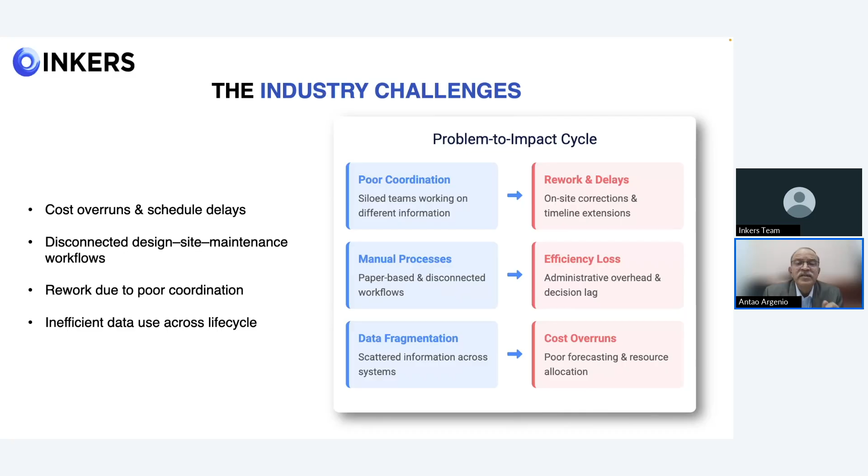Efficient data use means using insights for predictive maintenance, better design, and continuous improvement. The future lies in connected data ecosystems where digital twins, AI, and analytics can turn all this raw information we have collected into real business value. To summarize these four points, cost overruns, disconnected workflows, rework, and inefficient data use, they're all interconnected. They reflect the need for greater integration, collaboration, and digital transformation. Addressing them is not just about technology, it's about changing how teams work together across the entire life cycle of a project, from concept to operation.

Now, even though we have the case that we have to adopt digital transformation, there are still barriers for us to address, to overcome. So even though we have clear benefits, this transition to intelligent construction isn't smooth. It's not so very easy, and it's not happening at the pace that we want it to happen, because every transformation faces resistance. Let's look at what's holding construction back.

The common challenges that we have: cost perception. Upfront tech costs overshadow long term savings. This has been a long term issue with the industry. When we review many of our projects, what we find out is that until it is adopted on a large scale, it still remains a little bit prohibitive sometimes to adopt technology. But the overall benefits that we can gain overcome the cost that we incur for projects.

My second major challenge is basically the cultural resistance. Why this cultural resistance? Project managers always have fear of change, loss of control. There is a lot of resistance, not only to the change, but also to data sharing. We have all information in data silos, where there is a lack of interoperability between platforms. That means all systems are disconnected. There is no system that is talking to the other.

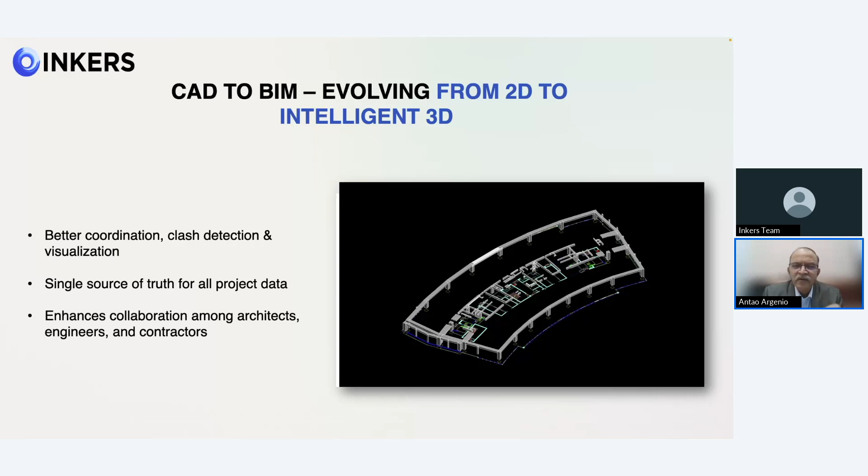The first step is generating a BIM model. And of course, the second step is turning reality into intelligence. That means bringing the reality into the models.

When we talk about scanning and creating BIM models, scan to BIM bridges the gap between the physical and the digital world. It captures the real world as-built environment and converts it into a digital twin of reality. Core advantage: it captures exact as-built conditions.

It reduces your site visits and reworks. You can preserve the heritage of the structure because it enables precise retrofit and maintenance planning. The as-built model can help in construction verification, helps in quality control, and having all this information built into the same model, it improves facility management post handover.

The workshop proposed the creation of a benchmark data set, anonymized—meaning you don't know where the data is coming from—but this high quality reality data can be used to train AI for predictive quality control, safety monitoring, and maintenance optimization.

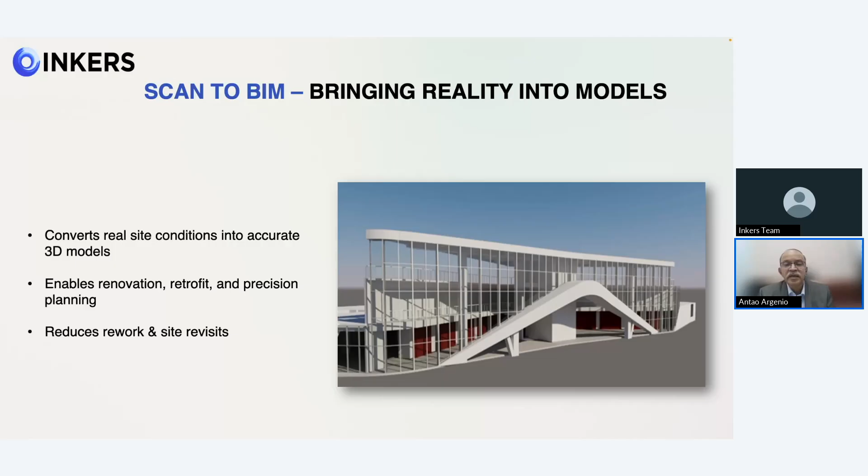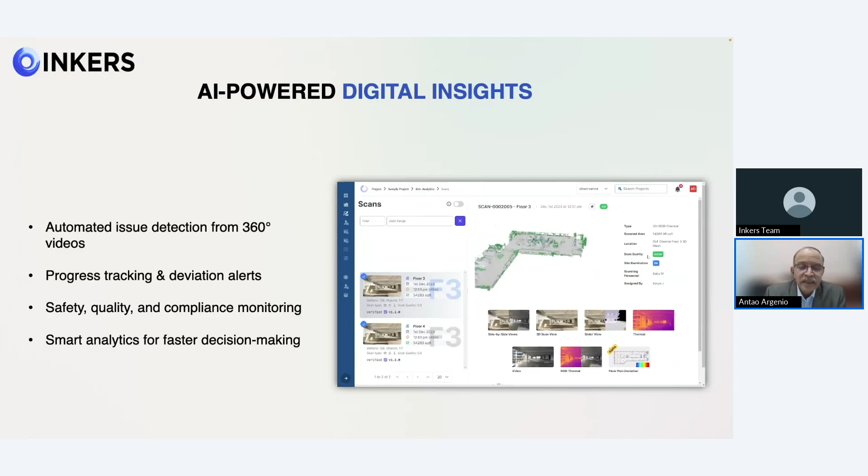So reality capture is not just about documentation, it's the foundation of continuous learning. Coming to AI powered digital insights, which is the new brain of construction, we are adding this intelligence layer, artificial intelligence. It's really the analytical brain that makes sense of the data generated by BIM, sensors, or any other source where we are capturing data digitally.

We already have applications being actioned through this AI powered insights: automated documentation and compliance check, progress tracking from 360-degree imagery, detecting safety violations in site footage, forecasting material demands and labor needs, predictive quality control to flag early deviations, and of course compliance reporting.

Referring back to the workshop, the top AI use case, which we are very close to, is project document generation. What I've not spoken about is knowledge capture and transferring this knowledge to other projects, to other stakeholders.

Predictive quality control can optimize the supply chain. You can forecast resources, track sustainability, analyze workflow efficiencies, and coordinate shared logistics. Each of these actually delivers measurable ROI: saving time, reducing rework, and freeing professionals for higher value tasks.

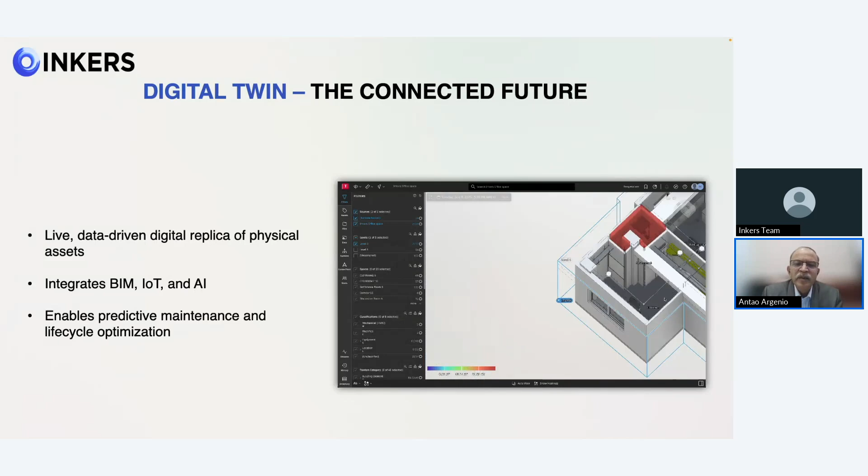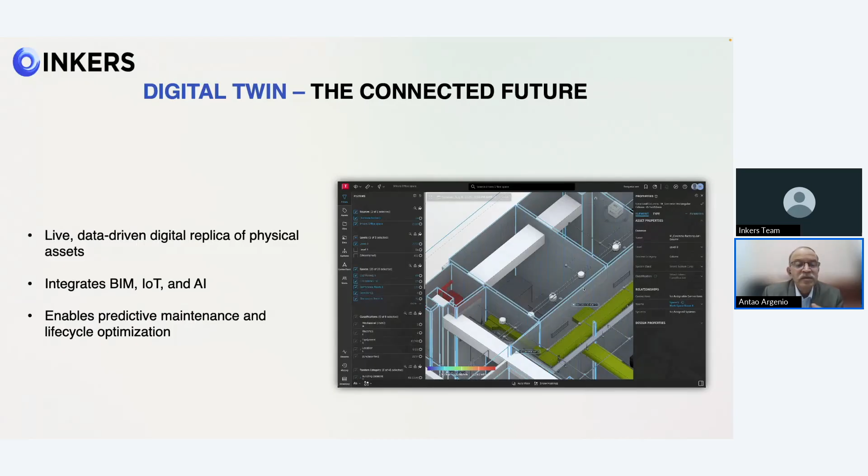What are its capabilities? To name a few: predictive maintenance, energy optimization, life cycle performance tracking, dynamic cost, carbon—the need of the hour—and utilization modeling. And of course there is continuous feedback between the design and operation.

Looking ahead, digital twins are envisioned as part of autonomous, self-optimizing systems, capable of real-time resource allocation, supply chain management, and safety interventions. These twins will not just mirror reality, they will actively manage it.

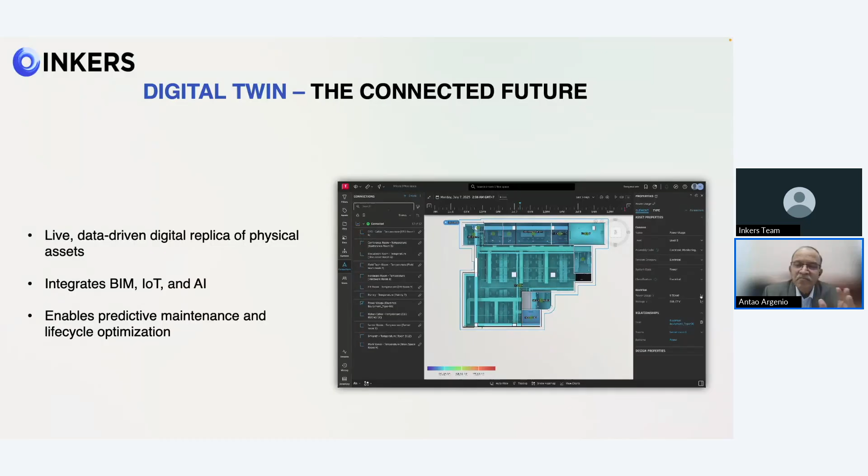In a decade, every major infrastructure asset will have a living digital twin that not only tracks what's happening, but will predict what will happen next.

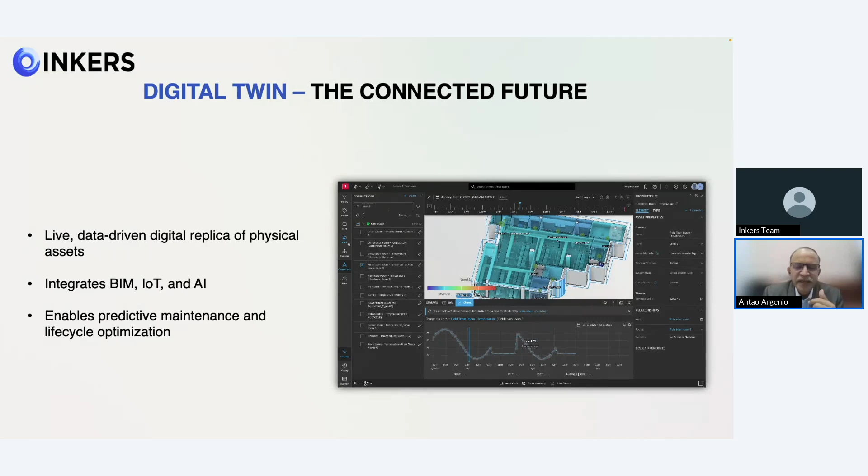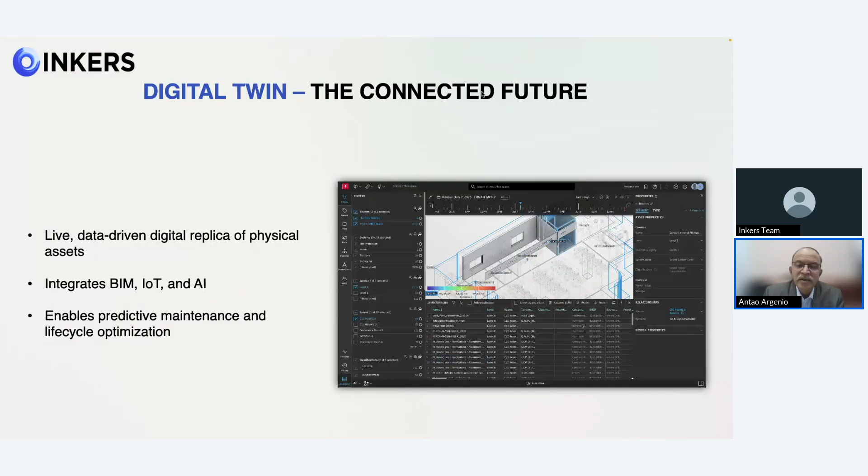As another example, there was a pilot project with an airport where digital twin analytics cut HVAC energy use by nearly 18%. It also improved passenger comfort, which everyone can see. It's an immediate operational as well as a sustainability win.

All these technologies that we spoke about, AI, BIM, and digital twins, converge into what we at Inkers Technology call the observance ecosystem. I'm not going into specific aspects of what the system delivers, but the core features and key components, which I believe have to be a component of every system that is developed.

The number one thing is collaboration through shared platforms. That means real-time cross-discipline coordination, open interoperable systems that connect all stakeholders.

Second will be transparency and data trust, end-to-end visibility across project performance, frameworks to share data securely while also respecting the privacy of the data and also taking into cognizance the competition.

Measurement. Again, I'm not talking about measurement of models. I'm talking about clear KPIs, reduction in rework, as we discussed before, 25 to 30%, delays, 20 to 25%, cost overruns, up to 15%. If you combine all of this with schedule accuracy and energy savings, you have clear KPIs that define the success of getting AI into the construction industry.